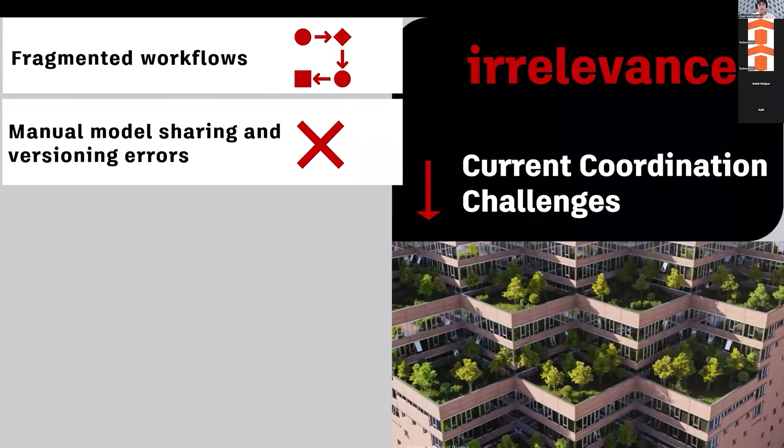That is the major challenge our industry is facing as of now, because the construction industry is very change reflective. There are changes at every stage of our life cycle. So what we are doing is working on the most recent, most up-to-date information. That is the most important and most challenging situation our industry is facing as of now.

Then again, the lack of accountability on clash resolution. Without clear ownership or tracking, clashes or issues often remain unresolved, delaying project progress and creating rework.

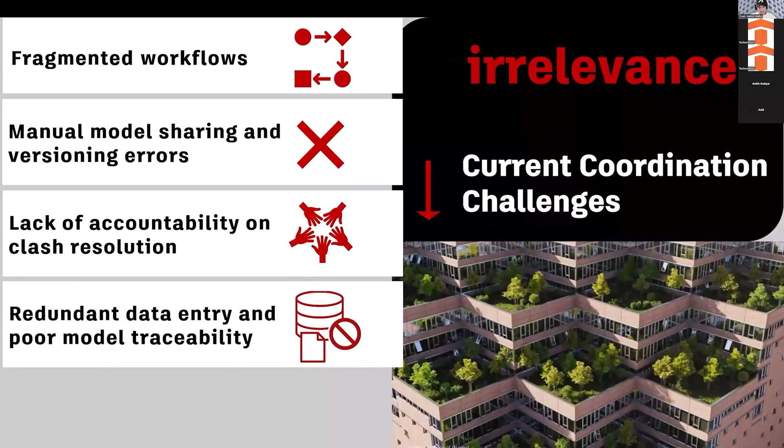Redundant data entry and poor model traceability. Models are not traced by where they are located, when they were updated, or when they were published to the site. There is no traceability at all.

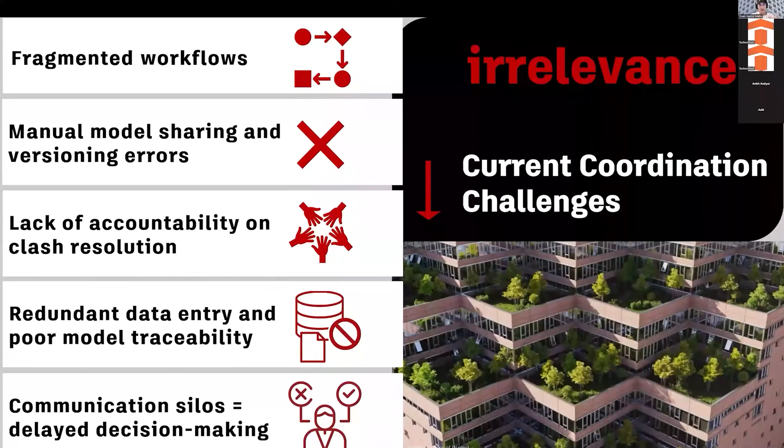And these challenges have some cost factor involved, right? So every challenge has a cost. If you are irrelevant, then you have to bear the cost. And how does the cost look like for the users, for the organizations who as of now are what we call irrelevant because they haven't yet moved to the digital adoption our industry is moving towards?

The first thing is clash related rework. It contributes to 10% of the total project cost. This is again from a CMAA report, Construction Management Association of America, which shows that if there is clash related rework, it contributes to 10% of the total project cost, which is huge in our industry. That is one cost effective challenge our industry faces if we are not moving to digital transformation.

Second one is poor communication. We don't know what is happening in our design office. We don't know what is happening on site. We don't know what other stakeholders are doing or designing. Maybe the duct is penetrating the wall, maybe the wall is penetrating the column. We have no idea because of the lack of communication, which accounts for 26% of productivity loss.

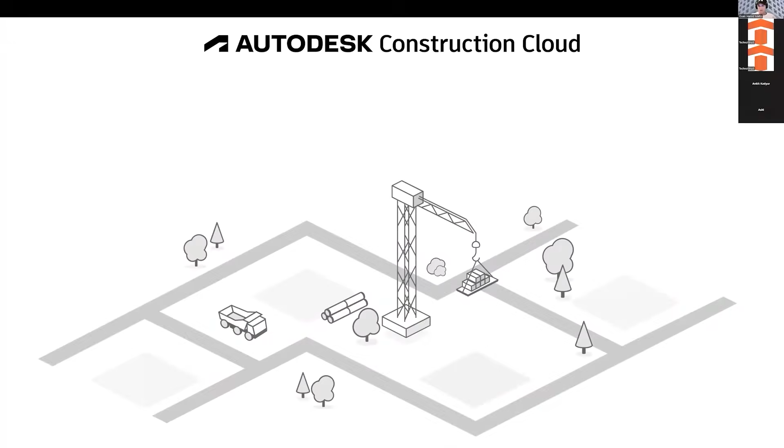This is all possible with the help of CDE, or what we call a Common Data Environment. In our terms, we call it Autodesk Construction Cloud, which is a connected platform that supports the entire lifecycle of the project, from design to planning to building and operations. It provides a common data environment to facilitate collaboration and improve efficiency across all project stakeholders.

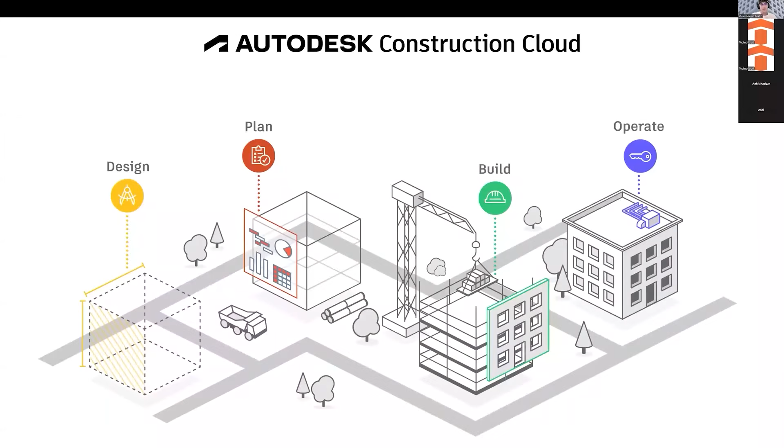It doesn't matter if you are working from project initiation till post construction, it is all there digitally. Every workflow is connected. If you create an issue on site, if you resolve an issue on site, it will be available to all the stakeholders involved in connected coordination.

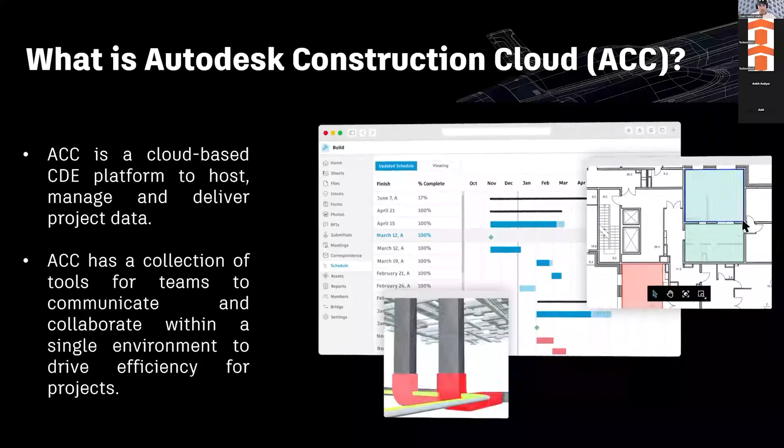So in layman's terms, what is Autodesk Construction Cloud? It is a cloud-based common data platform to host, manage, and deliver project data from initiation to the end. It has a collection of tools to help communicate and collaborate within a single environment to drive efficiency for projects.

With the help of this ecosystem, we drive what we call connected coordination, where everything is coordinated with all the stakeholders out there. If you are a mechanical engineer, an architect, an electrical engineer, a landscape architect, everything is connected in this ecosystem. People talk to each other, sheets talk to each other, models talk to each other, right?

That is the power of hosting your data into the CDE. And all this happens with the help of integration workflows.

Step one is model authoring and design collaboration, which happens in a module called document management. Step two is aggregation and coordination setup, which happens in the most powerful module of ACC called model coordination.

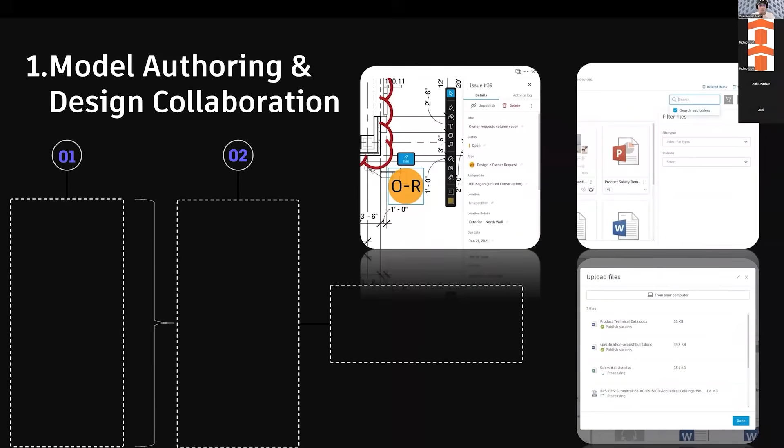So when working with Docs in connected coordination, the admin of that particular project creates different teams or different folders. Maybe you will find a folder for architecture, maybe a folder for structure, maybe a folder for MEP, or it can be vice versa, or there can be many more functionalities and stakeholders involved in the project. It makes sure that in the common data environment, everything is stored as a CDE platform, so there is no repetitive work.

Daily work is saved, whether you hit the sync button in Revit or publish your sheets via AutoCAD, everything is saved in Docs automatically. Daily work is also tracked.

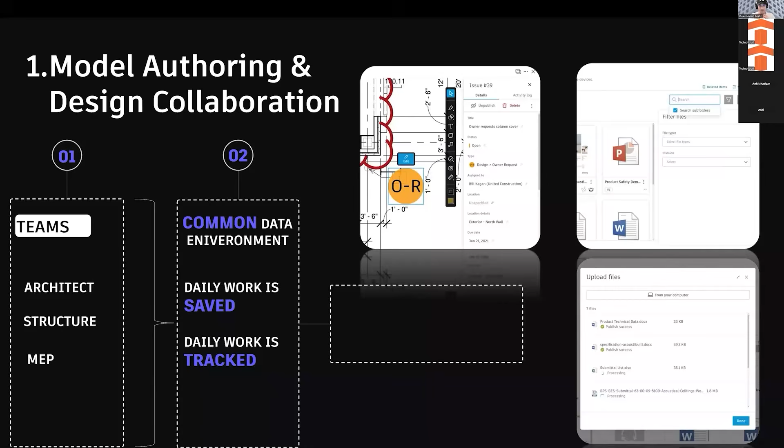You can see when information was uploaded, when somebody did a markup, when somebody created an issue, or when the version changed from the previous version to the new one. Everything gets tracked in this common data environment. The best part is daily work is version controlled, meaning if you want to see how information looked a week ago, ten days ago, a year ago, or five years ago, you can go back to any version at any given moment of time. That is the most powerful feature of the common data environment under the connected coordination umbrella.

Sorry to interrupt, just one question. You mentioned version control—can you give a small example of version control and its importance if you're working on a real project? How is it relevant to what we are doing? Thanks, that's an excellent question.

My next slide will showcase how this relates to our current workflow and why it's important for all stakeholders to see what happens if we go back in time, what changes were made, with the help of version control. I'll move to the next slide with a live demo.

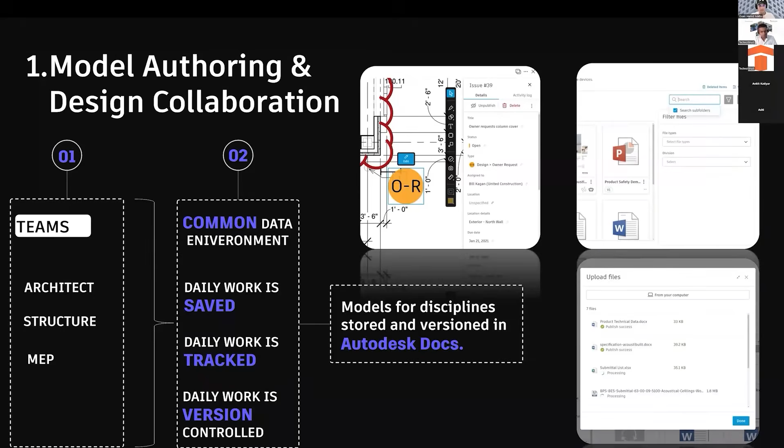Let me quickly go to the demonstration mode. I hope this screen is visible. Yes, it is visible.

Great. So as you can see, this is what we call the common data environment - this is Autodesk Construction Cloud, and I'm in a module called Docs, shown on the top left corner of your screen. As an admin, I might have set up the project like I showed you before. There are different folders set up by the admin or the person responsible for creating that project. If I expand this, you will see different folders.

You will see WIP, shared, and publish. Depending on whether you're following ISO 19650 standard, there's no hard and fast rule for how you set up the folders - it depends on how you manage to drop information from one realm to another, from WIP to shared to publish. That's what's important. You can name it anything, but this is the industry standard, and that's how we name it in most of our projects.

Under WIP, you can see there are different stakeholders or teams - architectural, MEP, structure, landscape. There's a lot going on here. Under shared, you have different folders. My aim here is that whenever my team is ready to share information with other stakeholders, I will copy or move that information from my work-in-progress folder to the shared folder.

There is a comparison feature which allows me to compare the changes coming from the previous version to the new version, enhancing overall connected coordination. What we see here are two different colors - one color coming from version 1, another color coming from version 2.

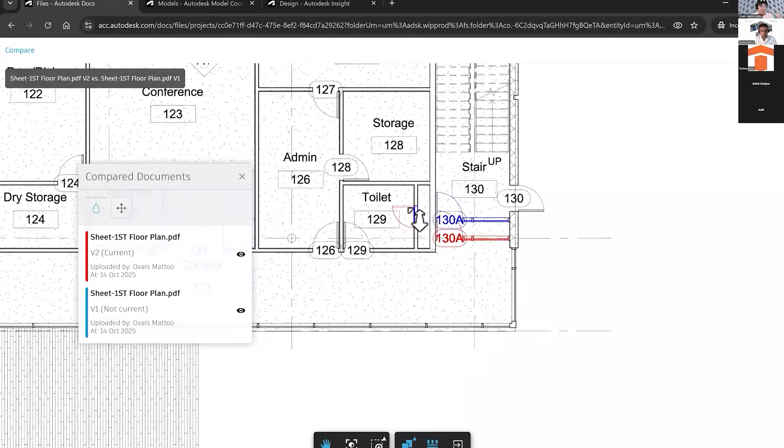If I zoom in, I see how this wall looked like in version 1 and how this wall looks like in current version, which is version 2. Similarly, a toilet shaft door had been added in version 2, which was not there in version 1.

This will help me make informed decisions and track changes. We are working in a 2D environment as of now, but this is also possible for 3D models. You can track changes for the Revit models itself, exactly seeing what has been added, deleted, or modified. You can export all this into a tabular report to report change orders to the dedicated stakeholders, saying you moved this wall, which is costing this much time, resource, and material, hence a change order. So we are able to track those changes.

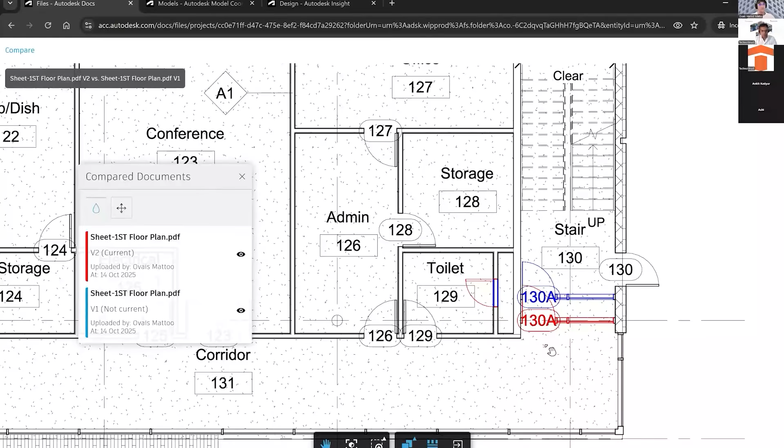How many versions can we track or compare together in this case? As of now, we can only compare two versions at a time. It can be version 1 with version 100, or version 50 with version 1, but at a time we can only compare two versions.

Now, my models are uploaded in work in progress, and I want to instruct my teams that whenever they are ready to share this information with other stakeholders, they need to follow a process with the help of design collaboration, where once these models are approved, they will automatically move from the WIP folder to the shared folder. Once they move to the shared folder, model coordination, which is a very powerful tool of ACC and the spotlight of today's discussion, will automatically begin the clash coordination for you.

You do not have to export NWCs, IFCs, or some other version to perform the clash coordination. You just have to hit the publish button in Revit, select the dedicated folder, and model coordination will automatically perform the daunting task of creating clashes for you. So let's see how that can be done.

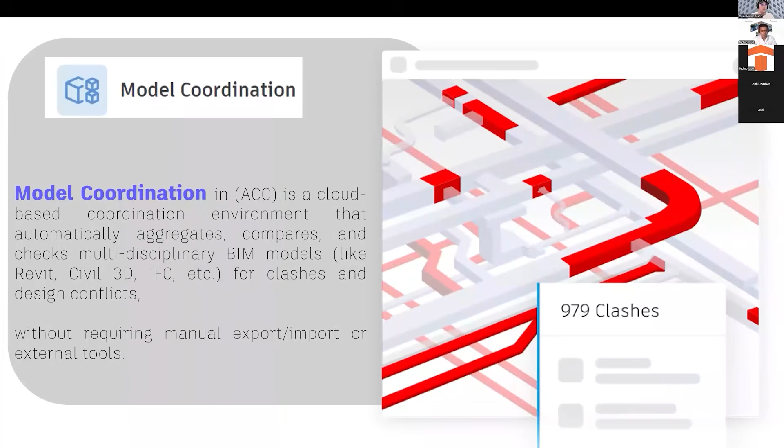So we talked about model authoring and design collaboration. Let's now focus on model coordination, aggregation, and coordination setup. For those who don't know, model coordination is a cloud-based coordination environment that automatically aggregates, compares, and checks multidisciplinary BIM models - it can be Revit, Civil 3D, or IFC. There's a site dedicated to what formats are available for model coordination and federation. It does not require manual export or import or external tools. If you're working in Revit, you can directly do model coordination and see the clashes once you hit that button. So let's see how this process actually works.

Okay, so Ovais, you are saying that like how we do clash detection activities manually in Navisworks - in this environment, we don't have to do it manually? Or is there a part that is automated and the rest we have to do manually?

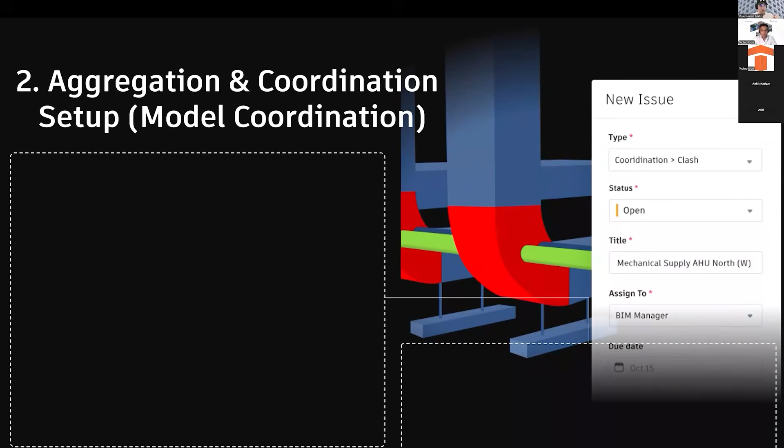That's a really good question, Yash, and you heard it right. In model coordination, you just have to save your model in the cloud and pick that particular folder, because model coordination needs to get the information from the source it is pulling. Once these two parts are done, everything is automated. Automatic clash detection would be there at your windows, and you will see how many clashes are there. We will go to that in a while.

So, like I said, the first thing is the trigger process - you publish. Just a minute, Yash, I'll stop you for a minute.

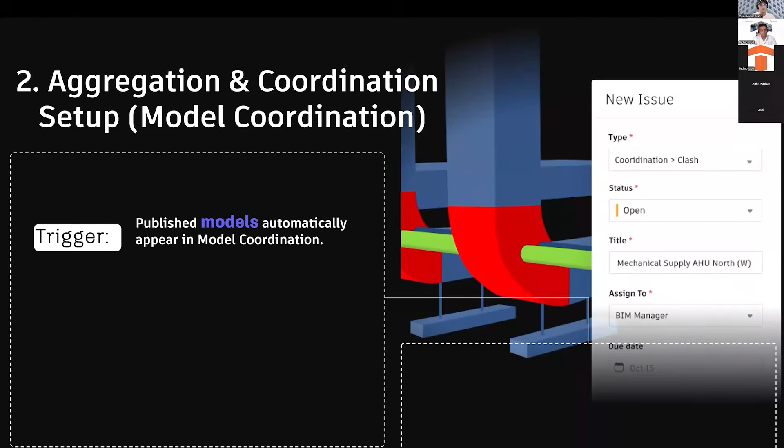But in most cases, users usually manually publish their models. Then comes the BIM coordinator, or BIM manager, who creates coordination spaces. So when we talk about coordination spaces, let's say you have 10 different buildings on your site, and you do not want to include all the clashes of those 10 buildings at an individual level. Instead, you need to create different spaces for building 1, building 2, building 3, till building 10. One coordination space would be dedicated to building 1, another to building 2, and the line goes on.

Then the model coordination auto aggregates all discipline models and runs automated clash detection. Once it is all done, model coordination will pick up the source and run all the clashes in the background without you even noticing it. It is this fast. You just hit the button, open the model coordination, and you will see all the clashes in front of you, which is super helpful in performing the overall connected coordination ecosystem in the cloud itself.

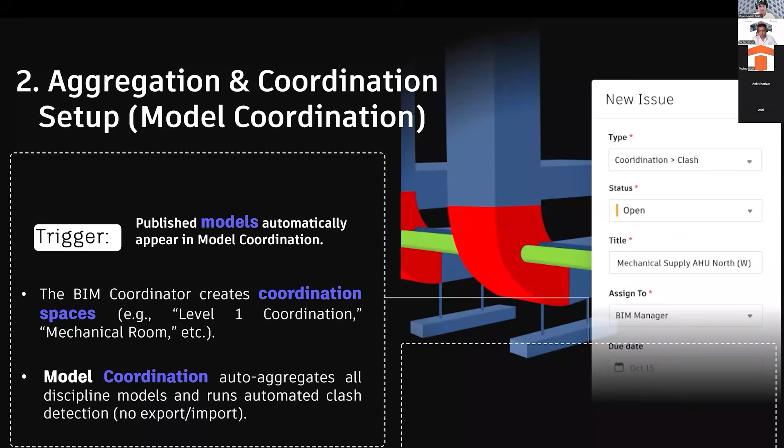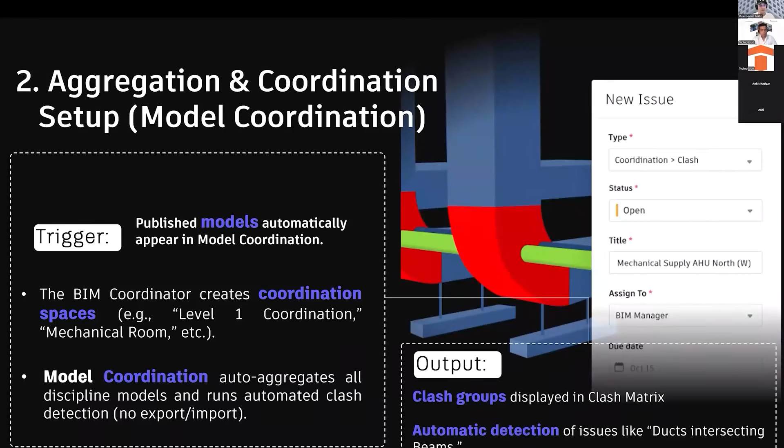And the output, you can see the clash groups displayed in clash matrix, or displayed in rows and columns. Automatic clash detection of issues like ducts intersecting beams, ducts intersecting columns. Mostly it is MEP, what we have seen. Mostly it is MEP elements who do the most of the clashing out there.

Let's see how this can be seen in the real world.

So as you see here, this is the same project, model coordination. And all my models and views are published. I have architectural, electrical, mechanical, public health, and structure. There are different tabs on my left hand side: models, views, clashes, issues, meetings. Everything is coordinated in here. You create an issue in model coordination that can be seen in another module of ACC, by a person who is on site doing the surveying part. Everything is well connected in this ecosystem.

Let's say I want to open two models, or two views, maybe mechanical and structure. Let's give it a try and click on open in the view. Depending upon the complexity of the model, it will take a couple of seconds, but it will load like this. And this is what we call the Autodesk Construction Cloud Viewer.

So in this viewer, you would be able to see your models, likewise what you have saved in the authoring tool in Revit. So how you save your model based on the view templates, based on the visibility graphics, based on what settings you have done in Revit, exactly that will be viewed in the ACC viewer. If you have given colors, mostly if you've given colors to the material aspect of that element, only the material colors would be visible in ACC viewer, not the filter colors. Just an important thing to note down here.

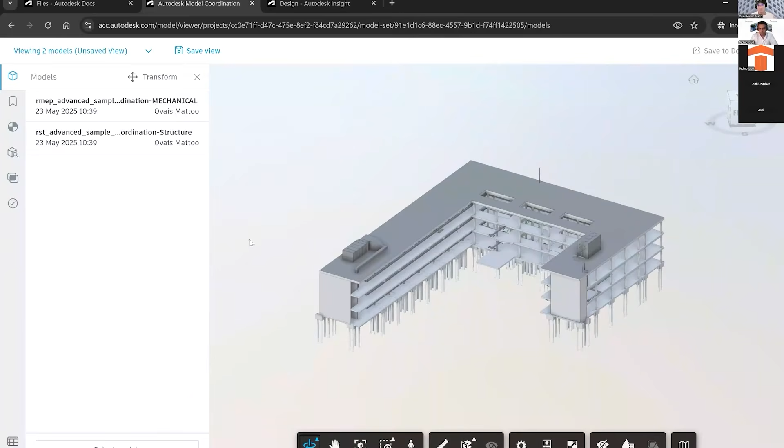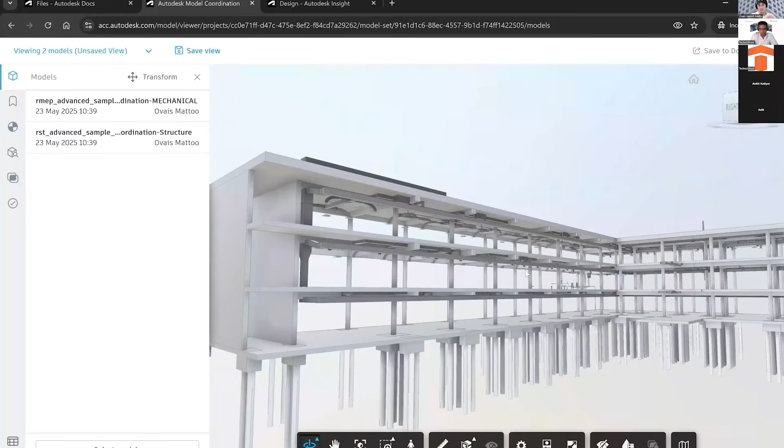And what I see here is the structure model, and all the MEP related services: ducts, flexible pipes, FCUs. What I can do is I also have the possibility and option not to see all the information. Most of the information for me is irrelevant. I'm not interested in floors, I'm not interested in pilings. So how do I make sure I filter this view and save this view in model coordination?

So we have a very intuitive feature called model browser, where you would be able to filter down this view to a granular level, down to where you have created systems in Revit. Mainly the MEP persons create different systems like exhaust air, fresh air, supply air, hydronic supply. You can filter this view based on those systems as well, it's that granular. But what we will do is, like I said, I'm not interested in floors, pilings, walls. Let's just hide them, or remove them out of this view.

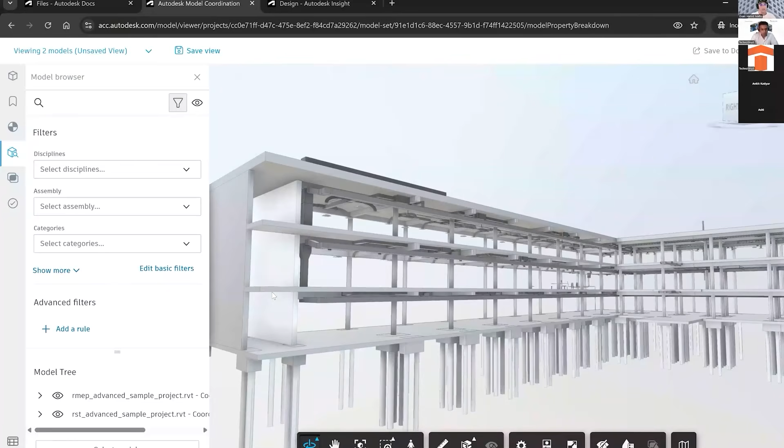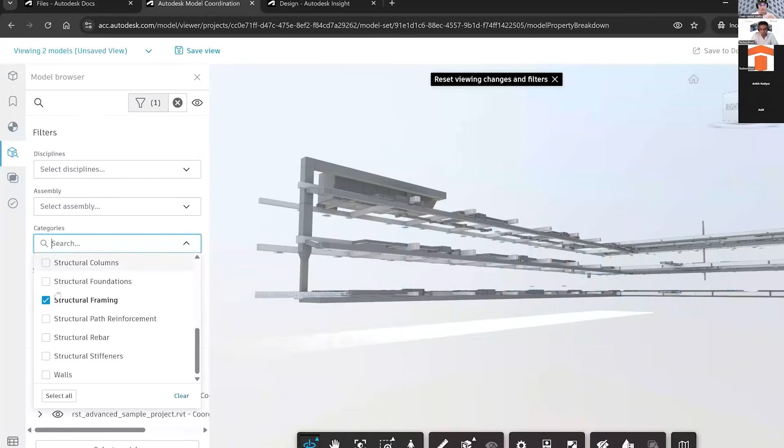What I will do is filter this based on the category. I just want to see the ducts, flexible ducts, duct fittings, air terminals. I don't want to see flexible ducts also, just mechanical equipments. And with the structure, I just want to see structural framing and structural columns. That's it, that is my view. Now, somewhat my view is clear. Now I clearly see how ducts are running towards every aspect of the structure model.

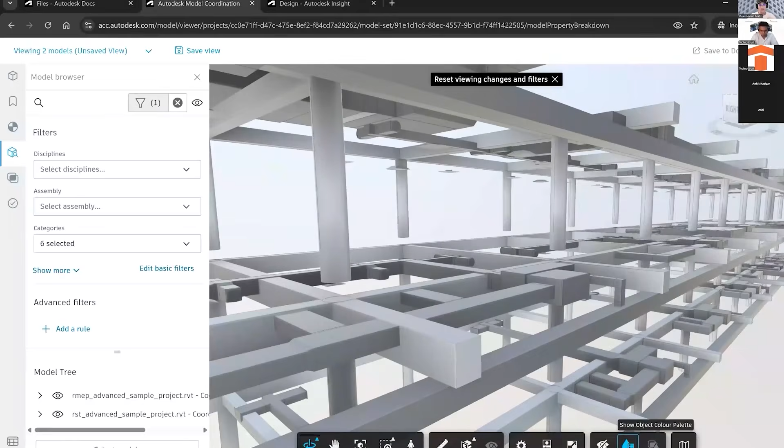Again, some of you might say it would have been great if we could see different colors. I know this can be a little challenging to identify what element belongs to what. We also have something called coloring, so we can color this based on property, file, and model. So if I color this based on model, I will give MEP all the red elements and structure all the gray elements.

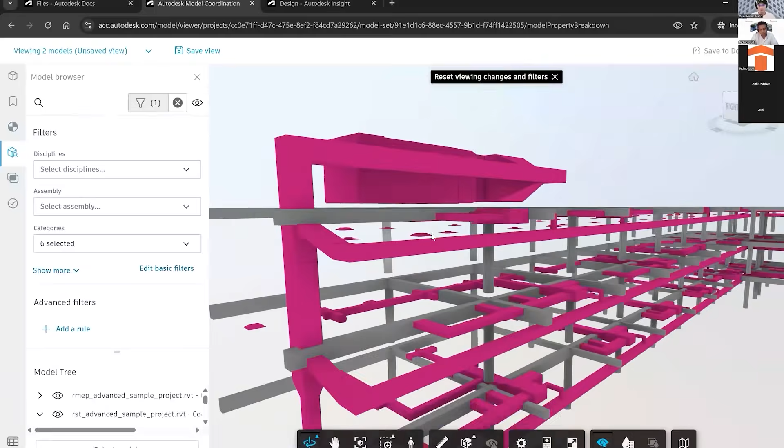Now it is much more clear to me. I can easily see my red elements belong to MEP and my gray elements belong to structure. And right here, I can see the clash in front of my eye.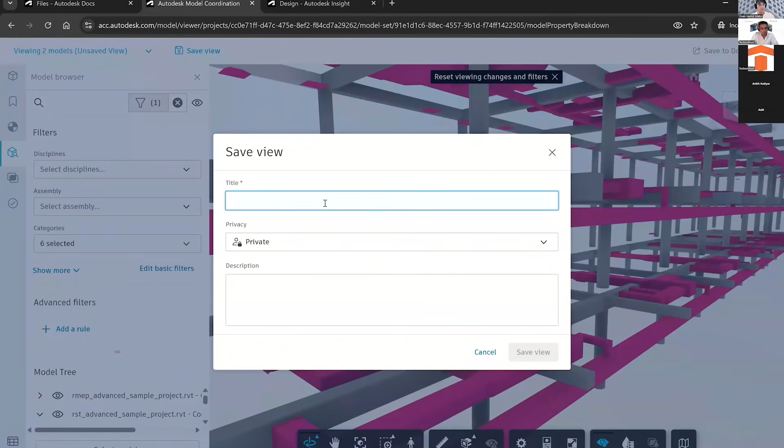Clashes: duct passing through the beam, duct passing through the columns. I can also save this view and give it a dedicated name. So any time I come to see this project next week, I can directly open this view and I do not have to do this filtering setting again and again over time. Let me name this view as ducts versus structure.

This view will be saved, and you can perform clash coordination as per this view.

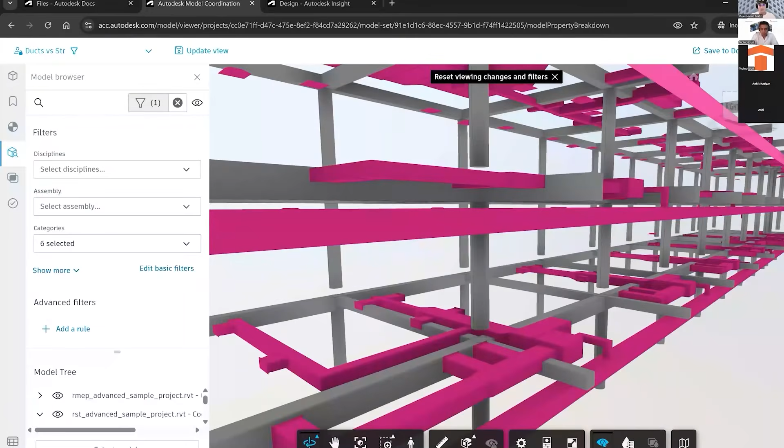Is there a way to add a section there? Yes. Let me just open the view, and all your views will be saved under the views tab here. This is the view that I just saved, and if I open it, it will retain all the filtering settings that I just did. Like Yash said, there is an amazing feature in ACC called hypermodal navigation.

You would be able to navigate through this model in first person view. You can immerse yourself in this model if you are using VRs. And also you can dissect this model based on x-axis, y-axis, and z-axis. There's a tool called section analysis.

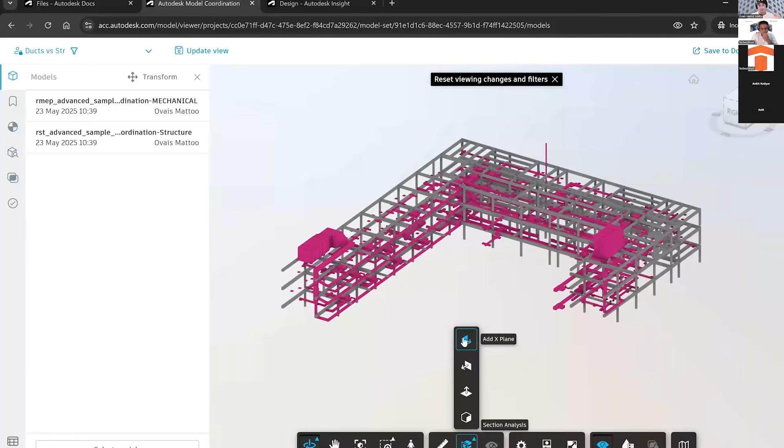So this is what can be helpful. Let's say I just want to see this part of the building. I have done the sectioning, and with a new feature we have called viewpoints, you can save this exactly how this is right now. So I can save this viewpoint. I will name it as test.

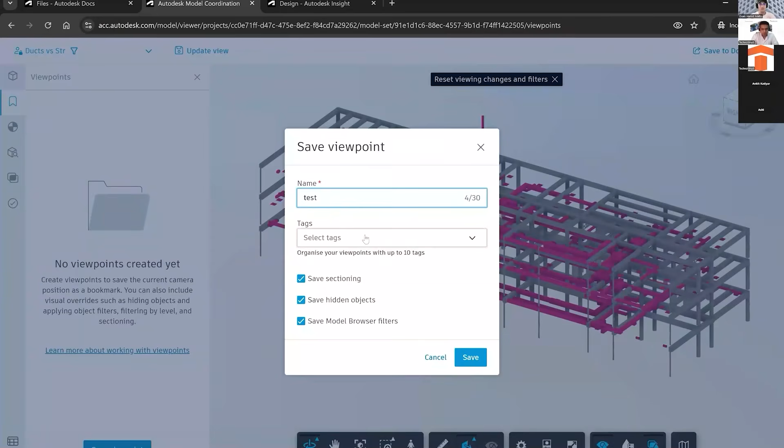There's an option of save sectioning, so you can save it as a section view, whatever you have created. Next time, whenever you are opening this, the view will be exactly like you have left it before. That's the power of this particular tool.

And we haven't even touched the main part. So let's come to the main part now. We have discussed model authoring. We have discussed the aggregation and coordination setup. Now let's go and identify some issues and create those issues out there.

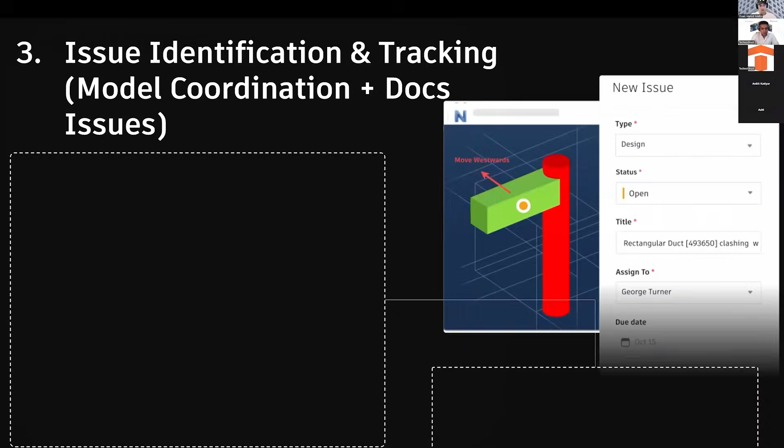When we talk about issue identification and tracking, each clash can be converted into an issue directly within the web viewer. I have seen people panicking while seeing 10,000s of clashes out there. A tip from me is, not every clash is an issue. You can have 10,000s of clashes, and out of 10,000 clashes, only 100 are valid issues.

So you do not need to panic. You do not need to get down and see each and every clash. It is there, and you can easily set them as not an issue.

And when you create an issue, the issue contains the screenshot and the viewpoint of that particular view, a description, the discipline owner, and the priority and the due date. So you can track exactly when I created the issue and when is the due date.

And also data links, so you can add data to this issue in the form of references, in the form of photos, in the form of technical drawings. You can add all the references either from your local storage or from something stored in ACC.

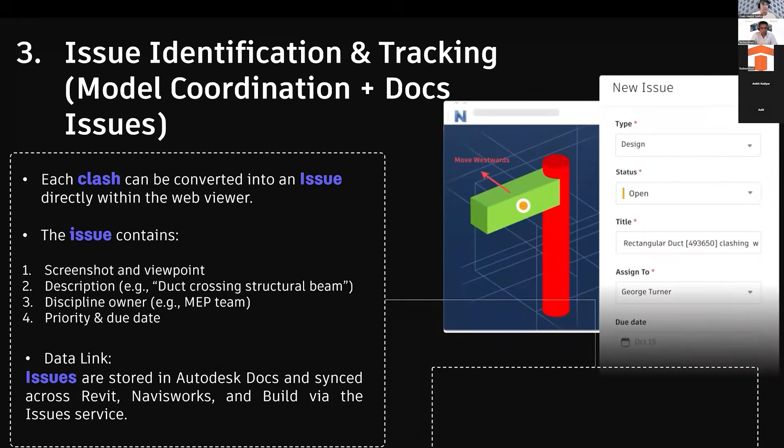And you can tag these issues to other modules of ACC, in the manner how we stay all connected. You can tag these issues to other modules like reviews, like build, like transmittals. You can also tag it to other stakeholders out there. And the output, like I said, is a centralized issue log with version history and status tracking.

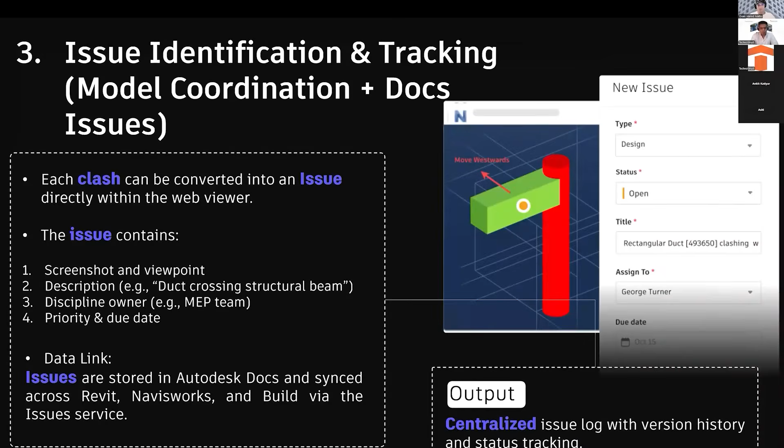Now let's go and understand what I just said to you. So this is the Clash tab. Like I said, everything is automated. Once you upload your models, once you upload the formats that are available as of now in model coordination, you will see this intuitive Clash matrix in the form of rows and columns.

So if I'm sitting, opening my laptop in the morning, I can directly see that mechanical and structure has the most number of clash groups out there, and I can simply open it, click it, and start assigning the issues. So let's open mechanical and architecture by simply clicking on that particular cell.

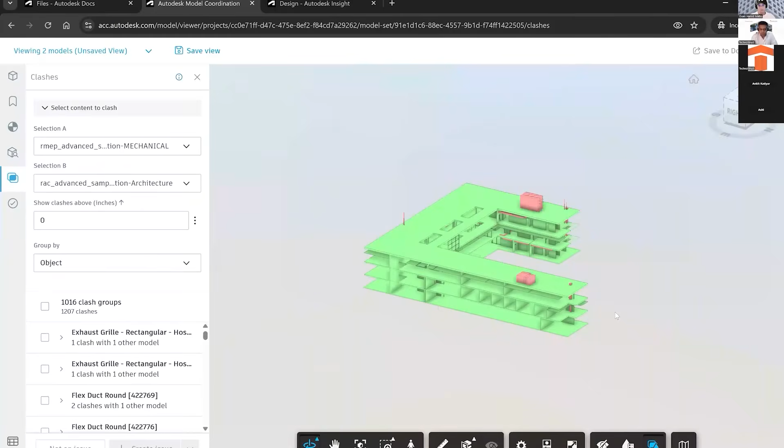So what you see here is a different view, a different color coordination where one model is green and another model is pinkish red. What I see basically here is the clashes that these two particular models have, and these are automatically created, automatically generated, automatically grouped. As you can see, all these clashes are grouped based on the object type.

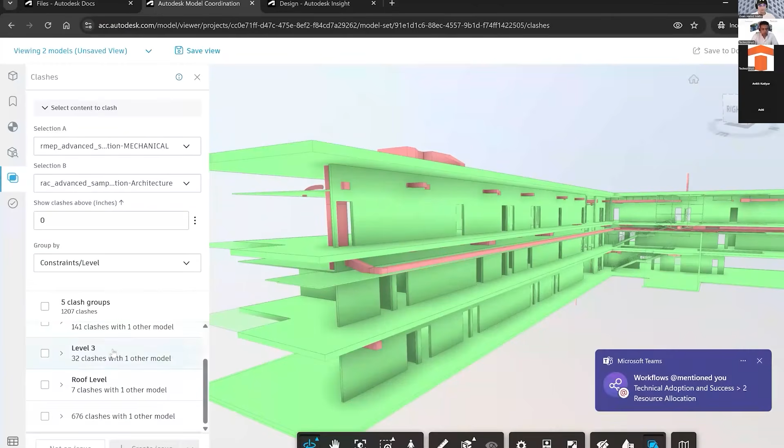But if you are curious to know, I want to see the clashes based on level, you can simply filter it based on the level. Now you can see clashes based on level 1, level 2, level 3, and roof level altogether. But my personal priority is object.

You can also set up the tolerance. Tolerance is the permissible intersection from one object to the another object. You can prioritize selection A and selection B.

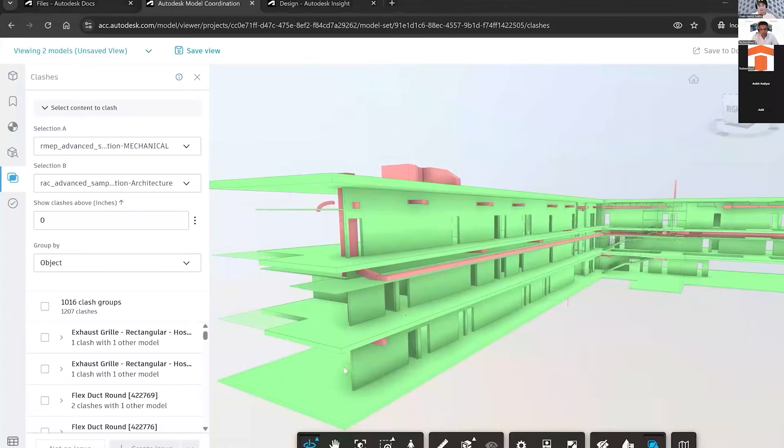So what I will do here is, just give me one second, I will quickly do the hypermodel navigation of this particular model. I will walk through in this model and immerse myself in this model to directly see where the issues are.

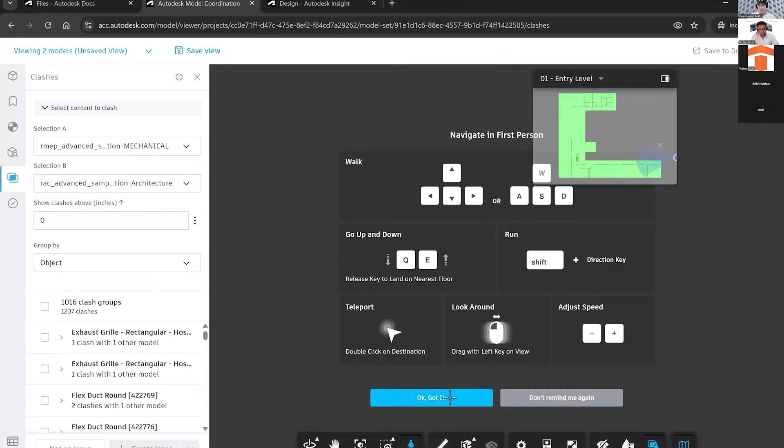I will click on first person view, move my cursor here, and as I'm moving towards my model, under the mini map, I can exactly see where I'm going, where my view is, my eye view, and at what level I am.

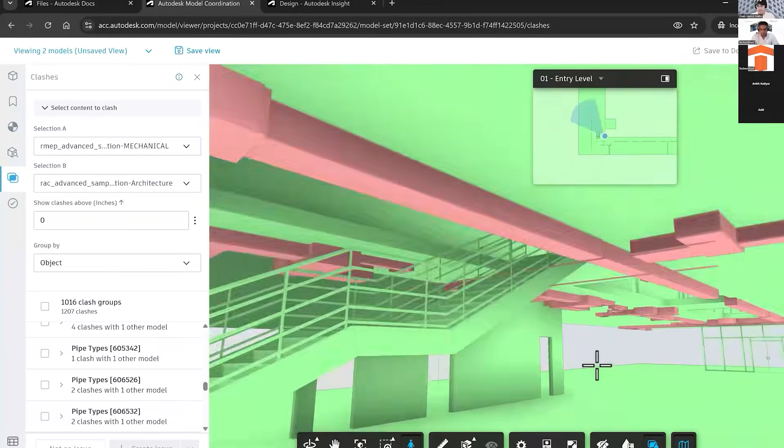And if I go towards the right, I can see some issues arising. I can see a duct is passing through this mullion, this window frame, right? And this is an issue. This is a valid issue. And what I would like to do here is start creating the issue out of it.

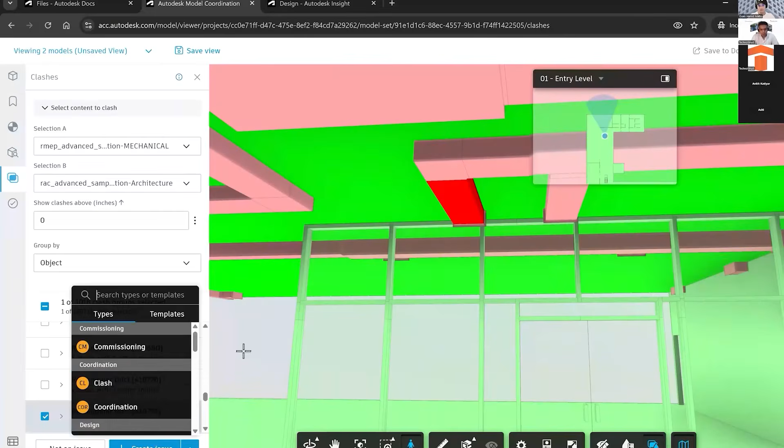So what I will do here is I will select this duct, and as soon as I select this duct, the respective clash will get also highlighted. Now I have an option to create an issue. I can select this as a coordination issue. Now I need to place a push pin here.

And as soon as I place the push pin, you will see an issue would be automatically created, which is issue number 14. It will automatically pick up the title, and it will automatically pick up the thumbnail. So this thumbnail is automatically picked up in the issue.

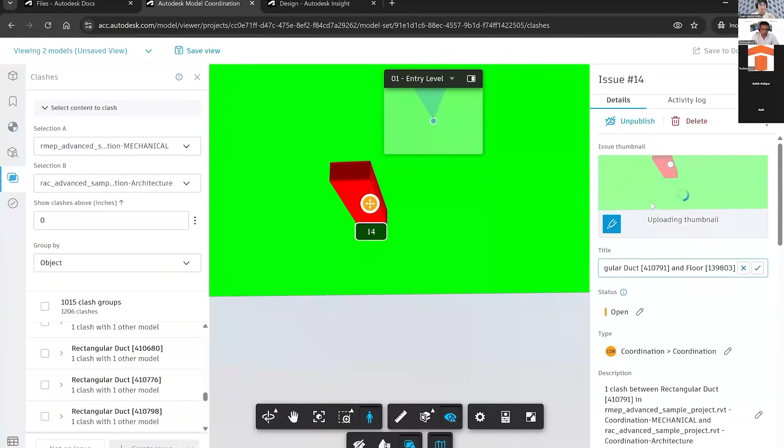If you want to edit it, if you want to mark it up, you can do that by selecting this pencil icon, and you can simply mark this issue. If you want to write it, you can write it: please move the duct by 100 mm. Let me also add a shape, an arrow, or let me just leave it like this and click on Save.

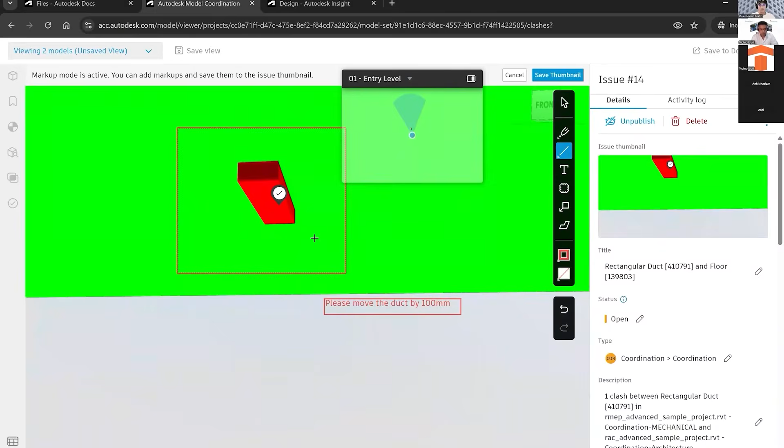So now this particular attachment, this particular markup, has been added to this particular issue. You can give a title to this issue, set the status as open, and then assign different sections like due date. I want this issue to be completed by the 23rd. The location, if you have specified location, you can add the location. The start date of this issue is the 17th and the placement is here.

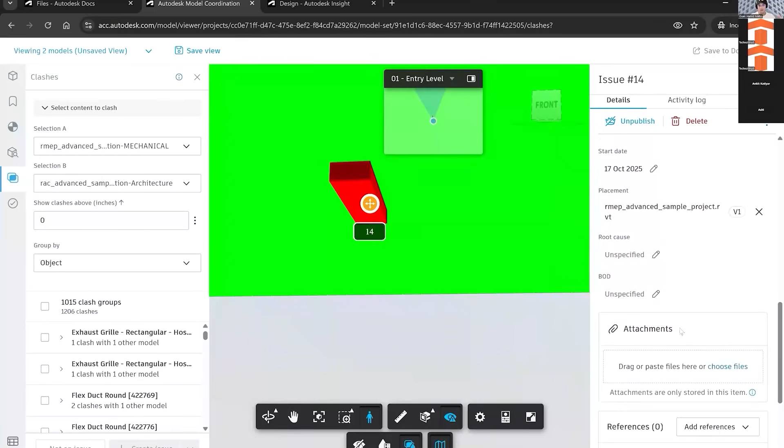So that's how you create an issue within model coordination in ACC.

Now, generally, what we see in the generic workflows in every company, in most of the projects that I have seen, we use Navisworks, and along with that, we use plugins like BIM Track or Newforma Connect, and we do the same thing in here. Now, what do you think, and how is this process superior to what we have been using generically? Great, that's a really great question, Yash.

So one thing, we are working in a connected space, which means that if we want to perform the granular clash detection, we make sure that whatever issue we have created in ACC, we bring that issue right into the standalone tool if you are working with Navisworks. So that is what we have called the issues add-in. Basically, the issues add-in connects your standalone tool to the cloud. If you have created issues in Navisworks, those issues get synced to the cloud.

If you have created issues in ACC or cloud, those issues get synced back to Navisworks. So there is no duplication of creation of issues. You know when this issue was created.

You can track that issue if you are working in a much overview setup in model coordination. But if you want to do deep dive, maybe you want to create search sets, you want to do 4D simulations, you want to create appearance profiler, then you can be assured that you are using Navisworks.

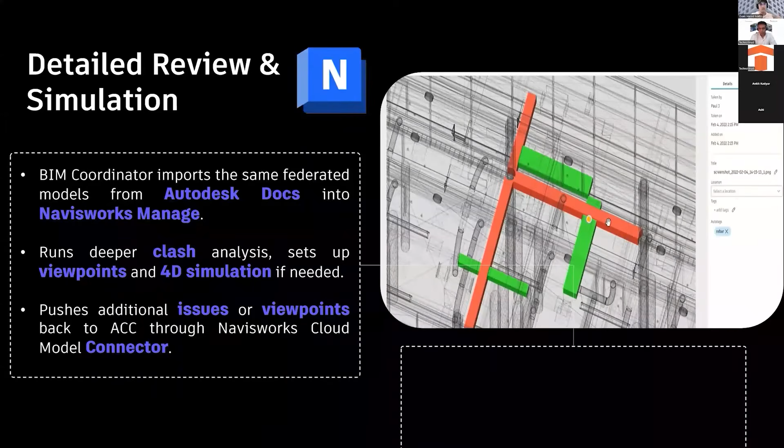They also push additional issues or viewpoints back to ACC through the Navisworks Cloud model connector called Issues add-in. The output is a consolidated coordination view with advanced clash visualization and sequencing.

And all issues are visible on the ACC dashboard. So if you see here, whatever views you have created in ACC, you can open those views directly in your standalone tool.

Called Navisworks with the help of Issues add-in. So there is this coordination tab, and you can see exactly what models are replicated. And again, you do not need to convert your models to other formats like NWCs or NWD.

You just have to save it to the cloud, and the cloud will do the work for you. You can directly open that information from your cloud to Navisworks.

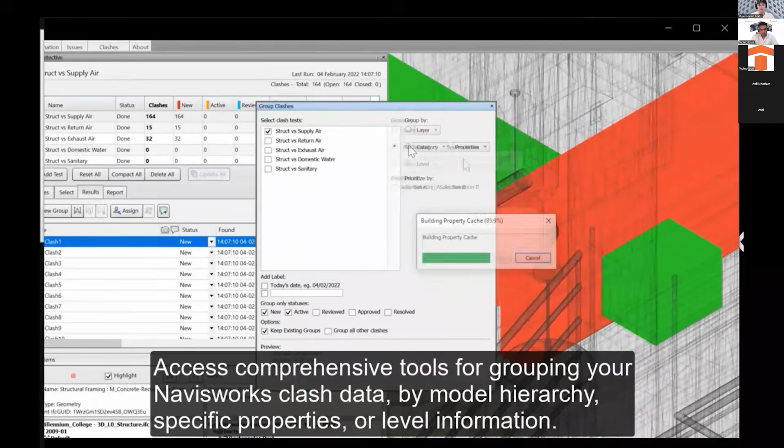So like you see, we are creating groups based on different levels, based on different category, and also we are prioritizing what we need to prioritize, how the groups are created. The groups may be created with a preference of selection A or selection B.

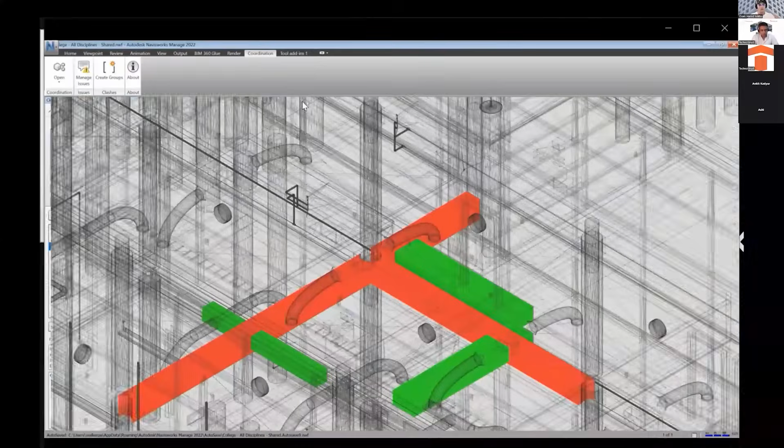So once we see something as a clash, what we need to do is we can change the status of this as reviewed or resolved. And also with the help of manage issues, you can exactly replicate and create the issues that you saw before in ACC.

This is the same window that I showed you before. What we are doing here is we are creating an issue in the standalone tool of Navisworks. And the good thing is, as soon as you select that, it will automatically add a view reference.

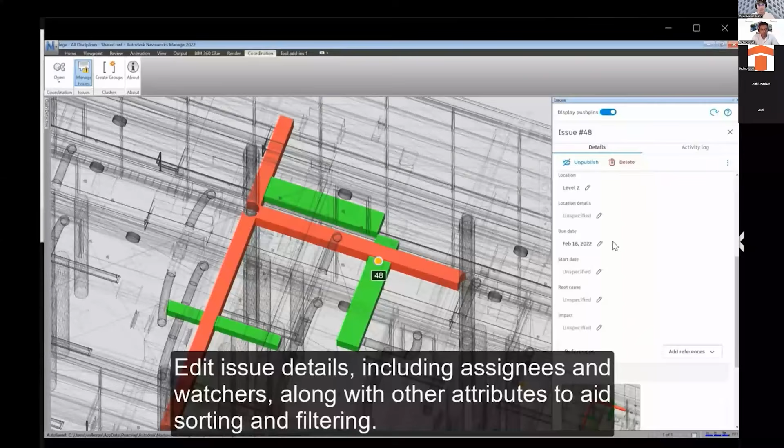It will automatically add the name of that particular clash. If you remember before, whenever you used to create clashes, you needed to screen grab what location you are referring to. You needed to manually add that information. Now it is not there.

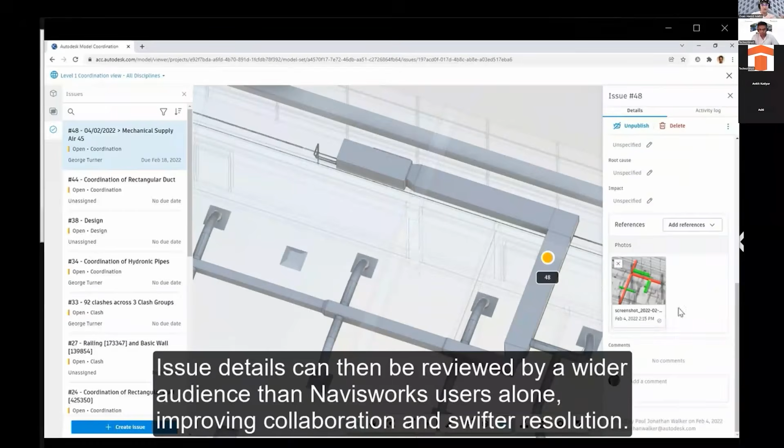And whatever you have done in Navisworks can be clearly visibly seen in ACC or the cloud to the other stakeholders out there, which are not part of your organization.

Do we need any kind of plugin to do this integration, or is it inbuilt in the newer versions of Navisworks? It's inbuilt in the newer versions, from 2024, 2025.

But if you are using prior versions, then you might need to download this plugin. What's that plugin called? It's called Coordination Issues Add-in. It's available on the App Store of Autodesk.

Like I said, everything is done. We have federated the models. We have done the version tracking. We have informed the other stakeholders that, hey, the issue has been created. Tomorrow is your due date, or day after tomorrow is your due date.

Now the ball is in your court. You need to get it resolved by this particular date. And the resolution process, of course, happens in Revit. So let's see how.

This workflow is very well connected with the standalone and the most powerful tool of Revit modeling. And we call it issue resolution and model update, which is again a part of Revit integration.

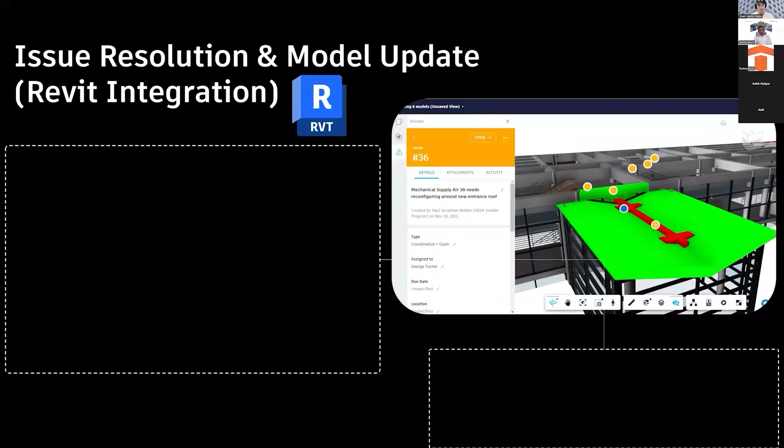So discipline teams open assigned issues directly inside Revit using the Revit issues add-in. The issues link to the exact model location and description.

Teams resolve clashes, and once resolved, the issue is marked as closed or complete based on the permissions you have been given. Mostly the modelers won't be having the closed permission, because closed permission is only restricted to the issue creator who has created the issue.

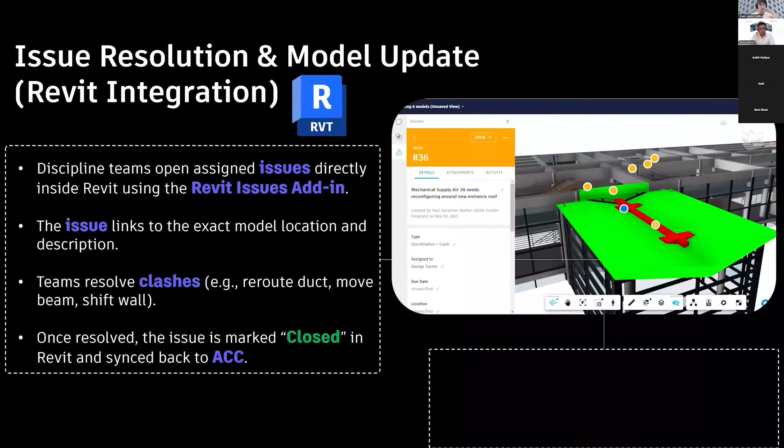He or she manages and decides if this issue completion is valid or not valid, and then only he or she can close that issue.

What modelers can do, they can simply complete the issue. So issues resolved are automatically updated in the central coordination model dashboard, and the coordinated model is ready for the next review cycle.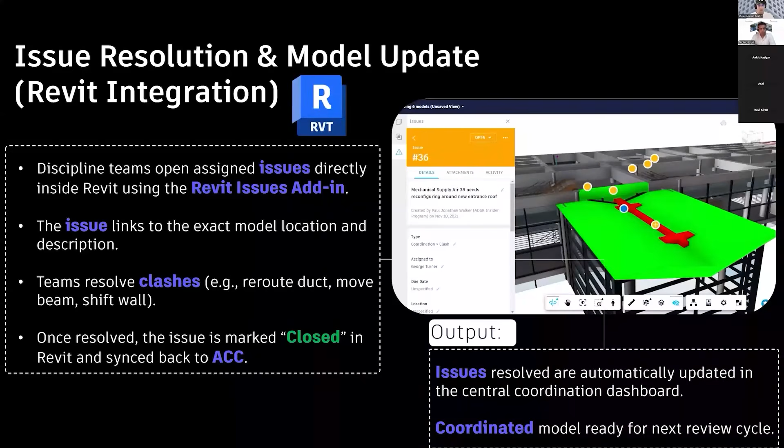Let's see how this also can be achieved via Revit. So you open your federated model or your standalone model, and this is done by the BIM modeler.

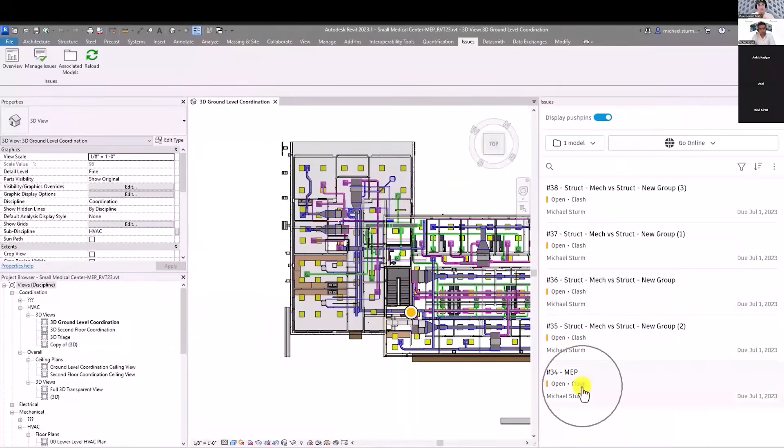Under the Issues tab, you will see the overall overview of how many issues are assigned to you, out of which how many are open, how many are pending, how many are in progress. You can directly open all the issues that are assigned to you and click on that particular issue.

I'll pause the video here. As soon as you click that issue that was created in ACC, the cloud, or the standalone tool called Navisworks, a new window will open which already has sectioning enabled. You do not have to press the BX command to isolate that element or use the sectioning tool in Revit to find where the issue is. This is done automatically.

And if you are a modeler, you can relate to how painful it was to find the issue at the exact location.

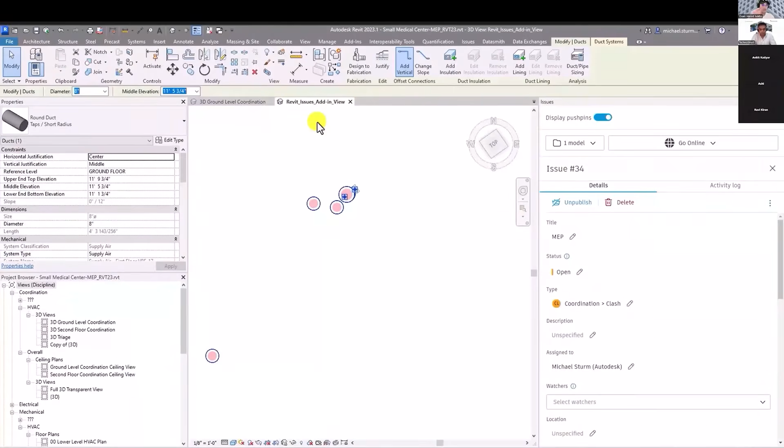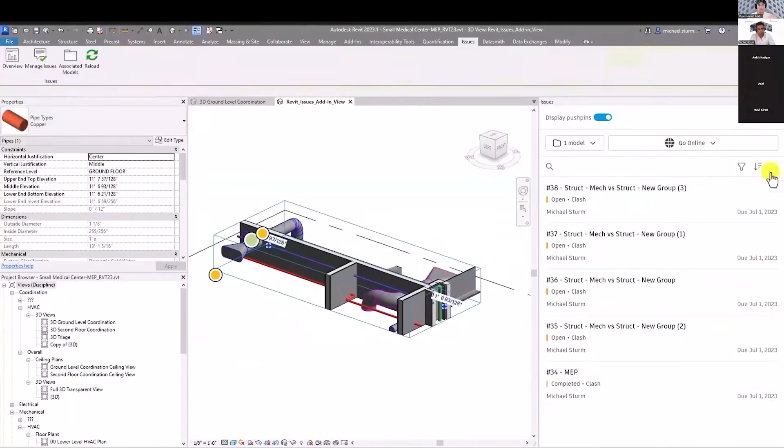So once Revit has automatically isolated the issue, it's time for the modeler to resolve this, like we are doing here. We are breaking the pipe, adding some connectors, and once done, we change the status from open to complete. The status will automatically change in Revit, and it will also be connected to the cloud.

As soon as we change the status here, this status would also get changed in the cloud. And if we open the cloud, the first thing we need to do is update and publish our model to the cloud. That is important.

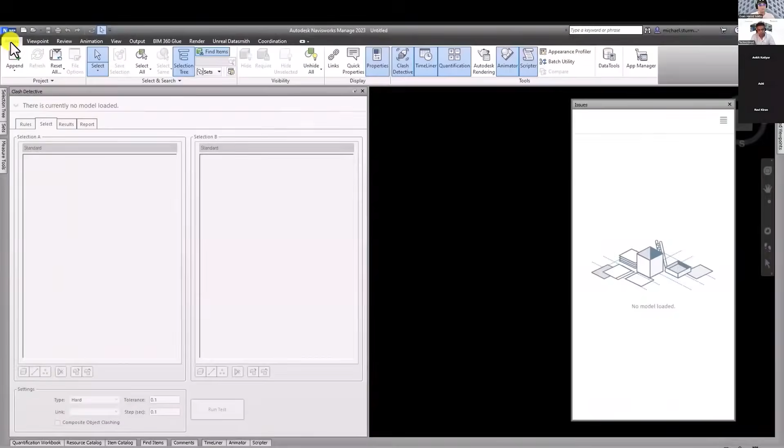What the BIM coordinator does is individually review this change. They open the NWF file, which again we have not converted manually — this is automatically converted from the last session that was opened from ACC to Navisworks.

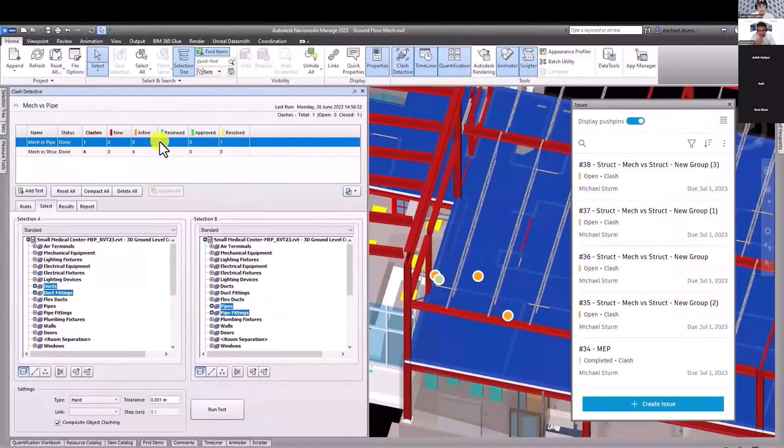They see that they update the model, see that one clash and issue has been resolved, and they verify it. Once they verify it, this has been done quite beautifully.

Now it's time for the BIM manager or BIM coordinator to close the cycle. Once they close the cycle, simultaneously they will see the update in ACC.

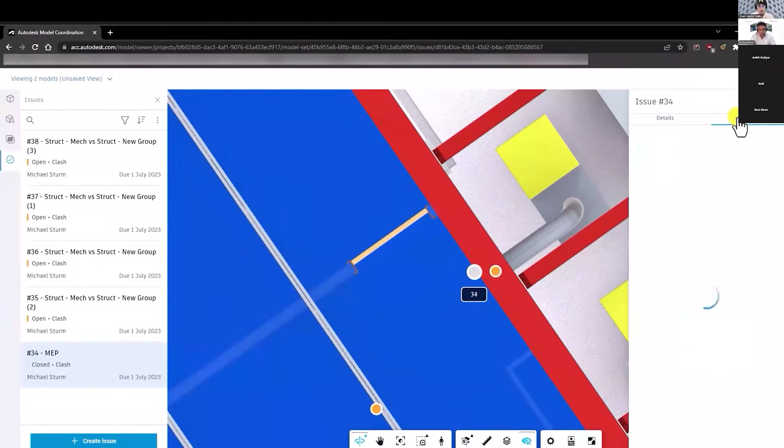You can see the activity log: when this issue was completed, when it was created, who created the issue. If you've added any attachments or references, that would also be available and continuously tracked in this well-connected, coordinated platform. Now we have resolved the issue.

Now comes the verification and sign-off part. We do this with the help of Insights dashboards, where BIM managers review issues, statuses, and visually verify resolution in model coordination. Issues marked as verified are closed, and coordination reports are generated as PDF or CSV for documentation and compliance.

And we would also be able to see a graphical representation of how many issues there are, how many are pending, and how many are closed.

And if you are an advanced user, you can bring all that relevant insights information to create Power BI dashboards where they can be live linked, and you can live-see the progress of your project.

I won't go into the demo for this; I'll just show you how that report looks. This is an issue report where you have your cover page. You can change the title and logo based on your organization, and then you have all the issues that arise from this project.

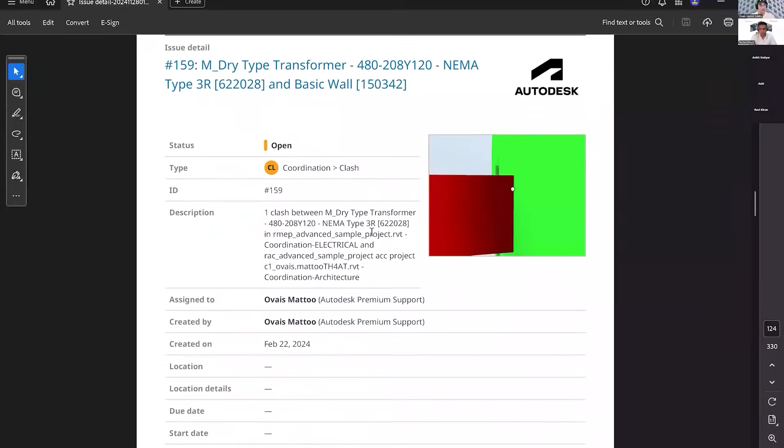You can simply select any of these, and it will directly take you to that particular issue. It will show when this was created, who it was assigned to, and what the placement is. The beautiful thing is that if you click on this particular link, it will directly open that issue for you.

So again, the outcome: 100% cloud-based coordination, no file transfer or version mismatch, reduced rework through early detection of design clashes, centralized issue tracking accessible to all teams, and lifecycle traceability from design through construction. That is the overall connected coordination in the cloud.

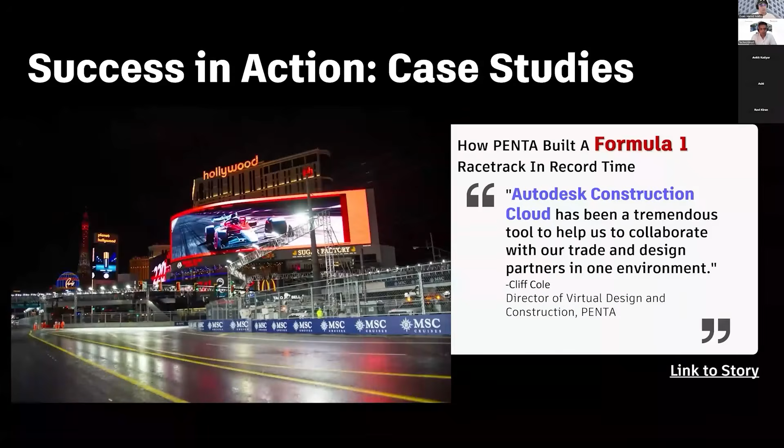And the users who have established it have made a drastic impact in this world, with case studies showing how this Formula One track was built in record time, how cloud-based coordination helped this organization keep a complex project on budget and schedule, and how this group delivers efficiencies and time savings to better the AEC industry.